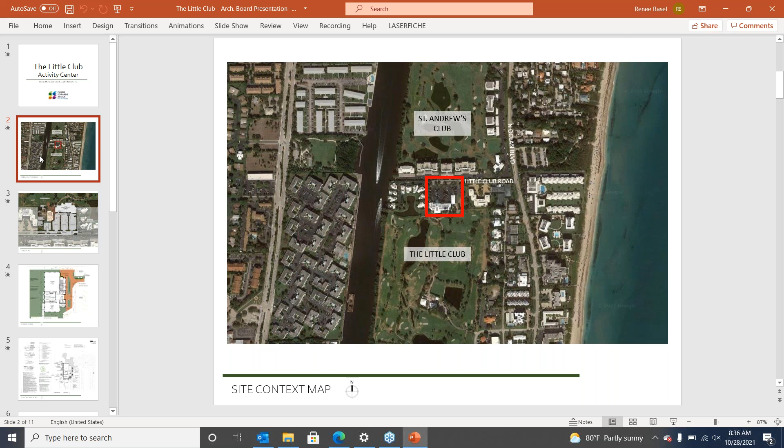So anyway, it's a pleasure to be here this morning and present this project before you. This is the Little Club. I'm sure you're all familiar with it. Basically, here's the site plan. I'm sure you know where it is, adjacent to the golf course and off of Little Club Road. Here's a site plan, and the existing clubhouse is shown in gray. Does this point? Perhaps.

Well, I just don't know the laser screen.

Okay, so what you see in gray at the top side of the parking lot is the existing clubhouse. To the left, what you see in the salmon peachy color is the proposed new activity center.

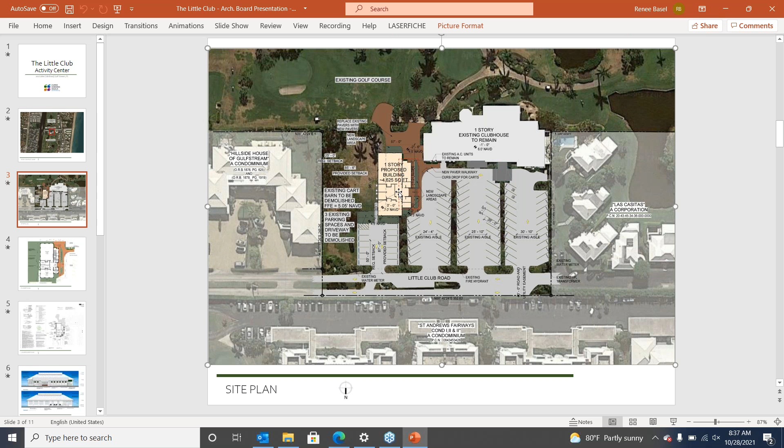There's a faint red dashed line underneath that shows where the current cart barn is. The current cart barn is about 2,300 square feet and is in somewhat structural disrepair, needing major structural repairs. So what we're doing is replacing it with the new activity center.

The new activity center is about 4,600 square feet, so we're basically doubling the size of the existing cart barn.

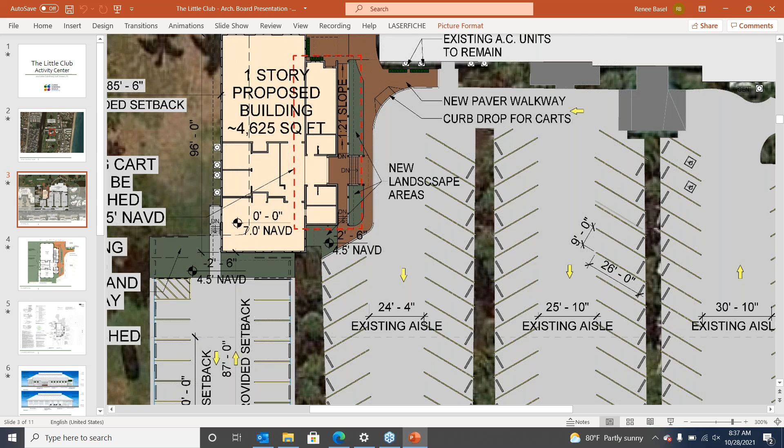Along with that, we're going to replace the pavers used for cart staging and bring a sidewalk around to enhance the backdrop.

The way this wanted to develop was we liked that when you came into the parking lot and the porte cochere, it created a courtyard and a sense of arrival. So it's fitting that we replace that cart barn with the activity center in this location.

So we are slightly larger, and the overflow parking is going to remain as is. I think we lost 2 parking spaces total when we did this, but we're also enhancing the landscaping plan. I think it's a very nice project.

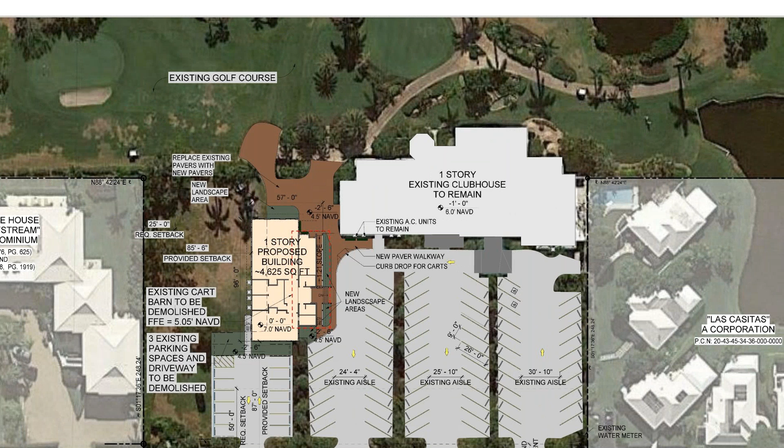We're going to the elevations now. Please interrupt me anytime if you have any questions while we're going through these slides. I also have some...

Oh, James? Oh, okay. I brought some photos of the existing site and existing conditions. If you want to see those, we can pass those around.

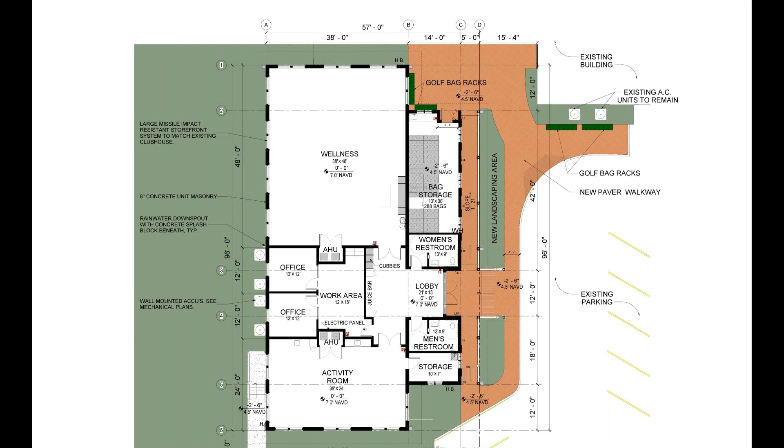So this is the floor plan. Basically it's a wellness area with some gym equipment, stretching, those kinds of things. We've got a baggage storage area, a couple of offices for accounting, and an activity room for things like basket weaving and arts and crafts, plus a couple of bathrooms. It's very small and intimate, and I think we made it pretty efficient.

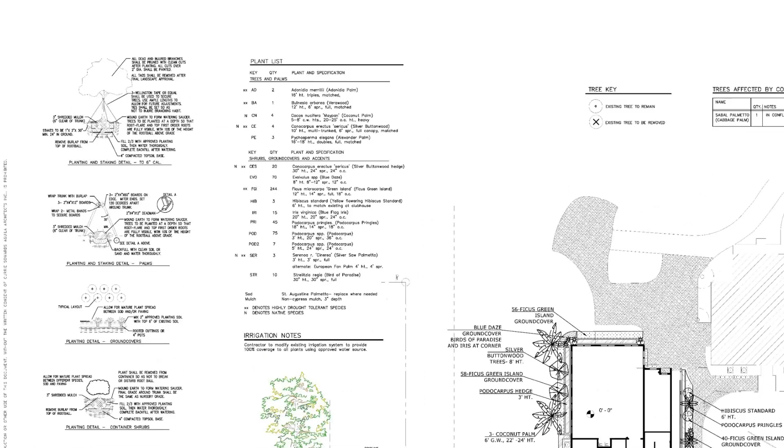So, landscape plan, Carol, you want to talk about the landscape? You may want to zero in on that. I'm Carol Perez with AGT Land in Delray Beach, Florida.

The landscape plan, we wanted to match what was already renovated over at the clubhouse, so it would feel seamless and blend right in with what was already done.

In the front, on the right-hand side, the west side, we've used Alexander palms coming up to soften the building on that side. On the east side, we have coconut palms planted for a tropical landscape. We've used the same shrubbery they used at the clubhouse before - podocarpus, with some flowering bird of paradise to match the accents they used.

We also proposed some trees - silver buttonwoods and a Bulnesia tree, which they also used at the clubhouse renovation as a yellow flowering tree. On the south side, we've kept it relatively open so there are views out to the golf course, which will create nice views on that side. That's about it, I think.

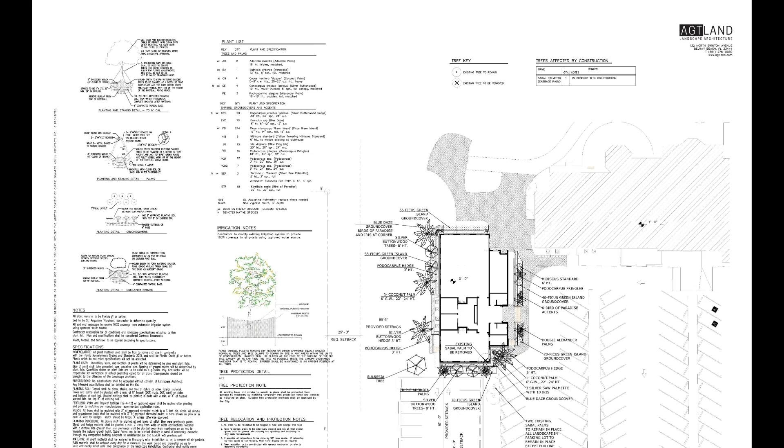Do the elevations show the landscape too? Yeah, okay, so you can see it better when Jess shows you the elevations.

Back to these elevations, please. So these elevations are shown without the landscaping. Everything we're doing is matching the existing clubhouse.

Mal Associates, who did the latest construction at the clubhouse, is also going to be doing this project. So we're utilizing exactly the same windows, same shutters, same roof tile. We're matching the roof slope, all the materials, white painted stucco - it's a Bermuda style. It was very important to match the existing clubhouse because we just want it to look like it has always fit in there.

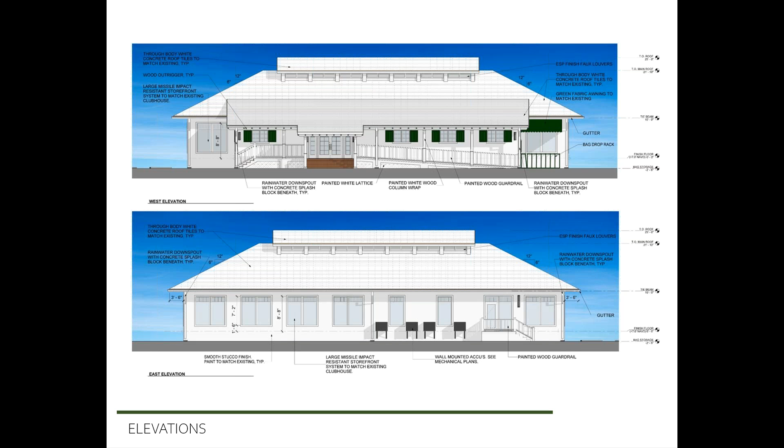If you want to go to the next one. We'll show that in the landscaping, but for the windows looking out to the golf course, we don't have much landscaping there because we didn't want to block the views. We're going to have treadmills, et cetera, so you can be looking out onto the golf course, but we do have low landscaping underneath those windows.

So that's the windows that we're matching from the existing clubhouse, and we're also matching the soffits. We've got big overhangs, we've got the wood soffits, so we're matching all that, same tinted glazing. That's just more of a detail of those.

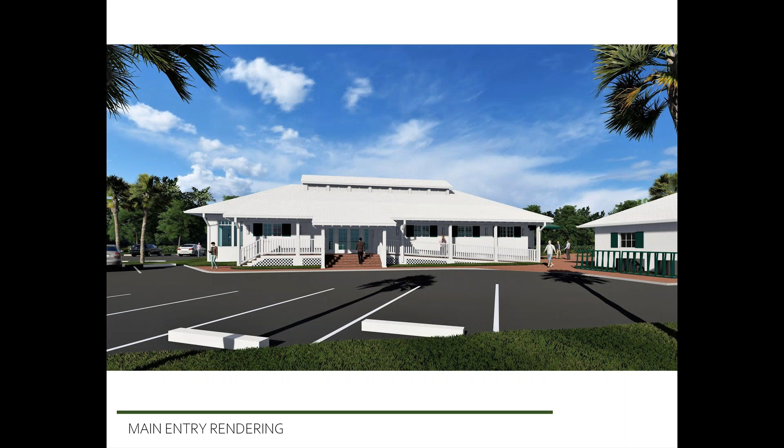So this is a perspective without the landscaping, and we've got brick steps, brick ramp coming up. I think it offsets the nice white, contrasting with the building.

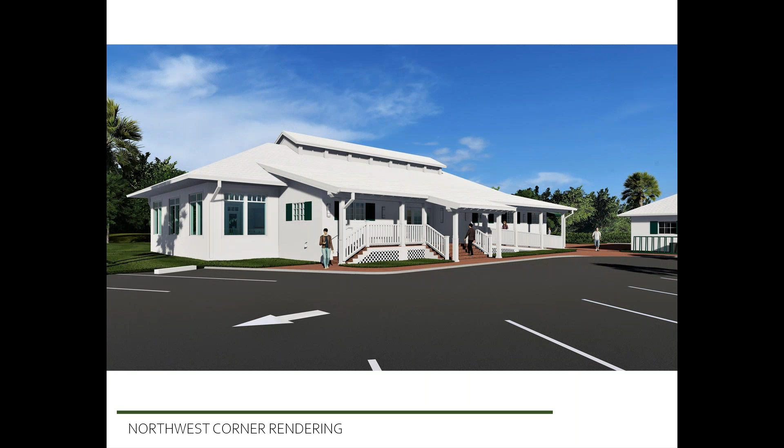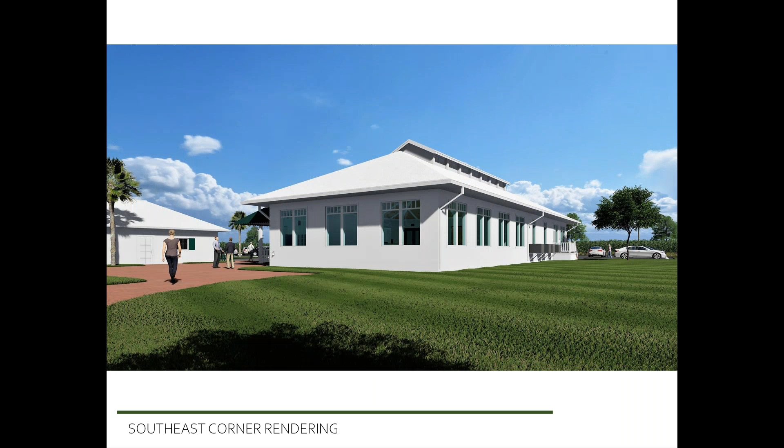And then this is with Carol's landscaping. And another view from the parking lot, and then with the landscaping. This is a view from the golf course, and then with the landscaping.

One of the things that we needed to do is the floodplain - we have to be at 7, and the existing clubhouse is at 6. So we've had to raise this up because it is pretty low there. So the building has to sit up a little bit higher.

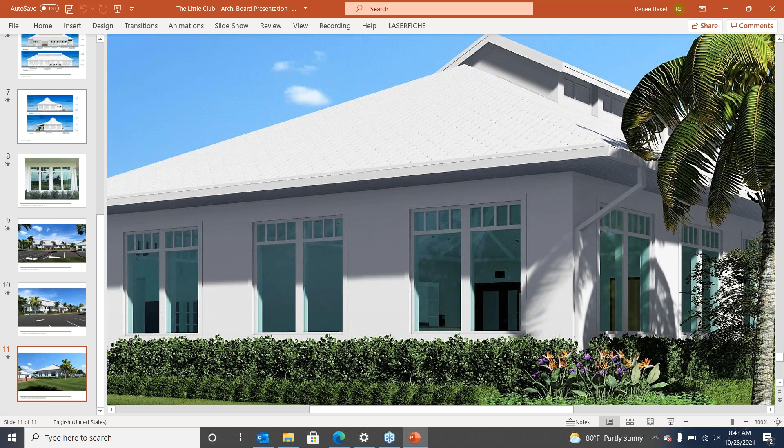Okay, yeah, so thank you. Any questions? I have a question about, I think it's on the east side where the air conditioning units are.

Yes, when you plant the hedges, it looks like they cover them - when you plant them, will they already be covering? We can make sure, I think you have a podocarpus there, it'd be the same height as, not taller than, the AC. Unfortunately, the AC units need to also be above the floodplain, so yeah, but we'll make sure that the landscaping covers them at time of planting. Okay, thank you.

You already answered one of my questions, was matching the existing clubhouse - so it matches structurally the full front. The roof, tell me a little bit about that roof feature that you have there. Are those real windows, or is there going to be high ceilings in part of that room? Yeah, the two rooms at the ends will have high cathedral ceilings in them.

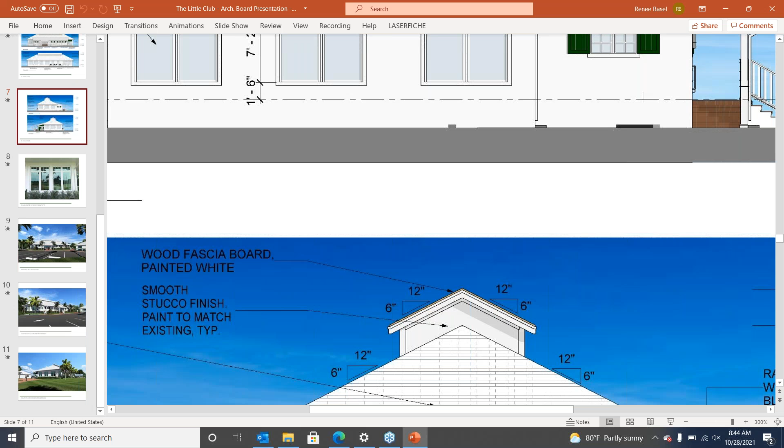Will there be natural light coming in at the upper level? No, actually those are louvers. So it's a cupola - we're just giving the roof some detail. It was still kind of a low scale, but it provided a little bit of interest to the building. But the louvers are not functional.

Did we have any comments from neighbors, Rita? Yes, we had two comments from St. Andrews, and they were favorable. And we had one from the Hillside House, which was favorable. Good, okay, those were verbal. Any other questions? No.

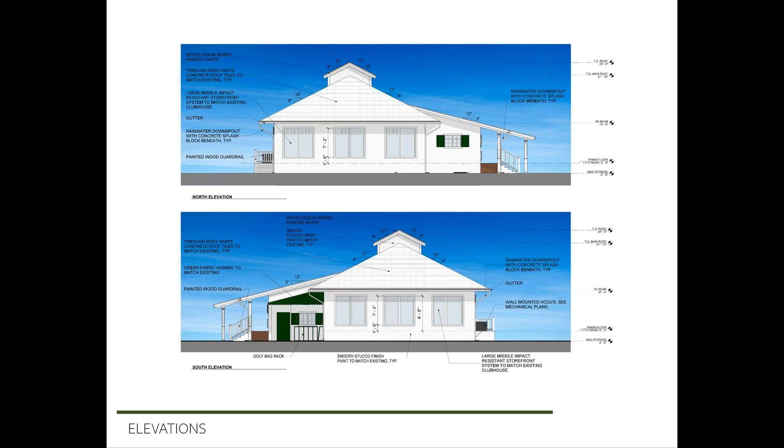My final question has to do with parking. It's something that I think can be handled upstream according to our legal counsel - you took away 2 or 3 spaces, but I'm wondering, since you're doing this renovation, do we need to address whether there is adequate parking there for the building? It has to do with maximum - Trey, can you explain that for me?

Sure, right. So you need 1 space for each 3 persons of maximum capacity of the facility, determined by its fire occupancy rating. So we can figure out what that is and see if we have any issues with needing to add spaces, and we can do that before the commission meeting, and talk with staff on that. Absolutely, on that point.

I know you have a lot of spillover space there on the east side, but I know when you have a massive event there, I'm just wondering - if you're like all the other clubs here, when you have a big event, there seems to be tight parking - but are you okay at your biggest event?

As I understand it, we have the right to park on our grass area there, and that's our overflow. And of course, the primary use of the activity center will be from early in the morning till maybe late afternoon, so there won't be a duplication with, say, a nighttime event. There'll be no real usage at the activity center at night, and therefore all of that parking becomes available when we have our larger events, which typically are at night.

Yeah, okay. So the only thing, I just think we'd like to recommend they address that before it hits the town, or at the town.

I just wanted to ask Mr. Curtis, are you familiar if you already have a capacity rating for the clubhouse itself? I don't know the exact number, but I believe it was calculated when we did the clubhouse renovation. Yeah, absolutely, I think we were well within it for the clubhouse.